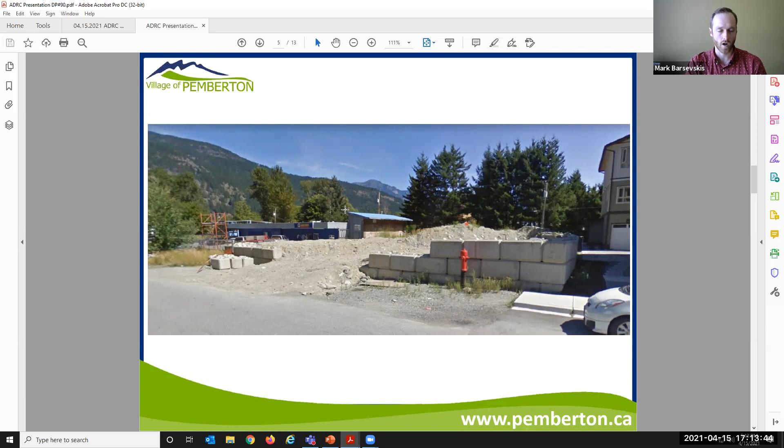Currently the site is vacant, with preload and lock blocks and a little bit of vegetation around it.

So the proposal is for one mixed-use building, which is 3 stories. On the ground floor we have 2 commercial units. On the second and third floor we've got 10 residential units, 7 being 1 bedroom plus a den, and 3 of them being 2 bedroom. The architectural style is modern contemporary.

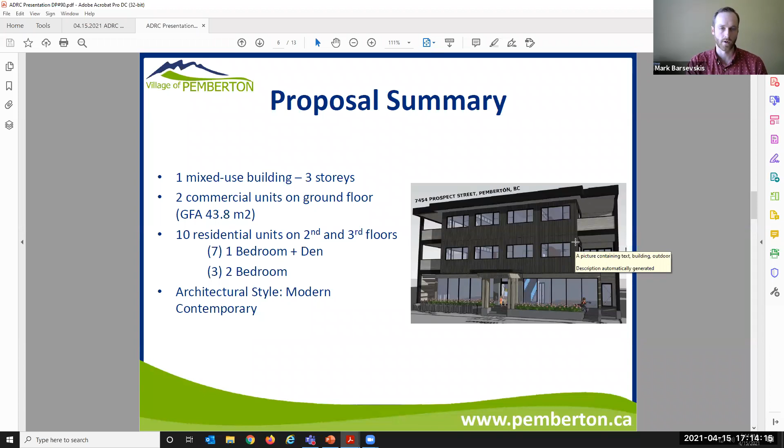The color palette includes shades of brown, bronze, gray, and black. We've got wood, light metal siding, and finished concrete around the building, corrugated metal on the sides here on the upper 2 floors, and these vast glass windows on the ground by the commercial units. Black is used as an accent color throughout the whole building.

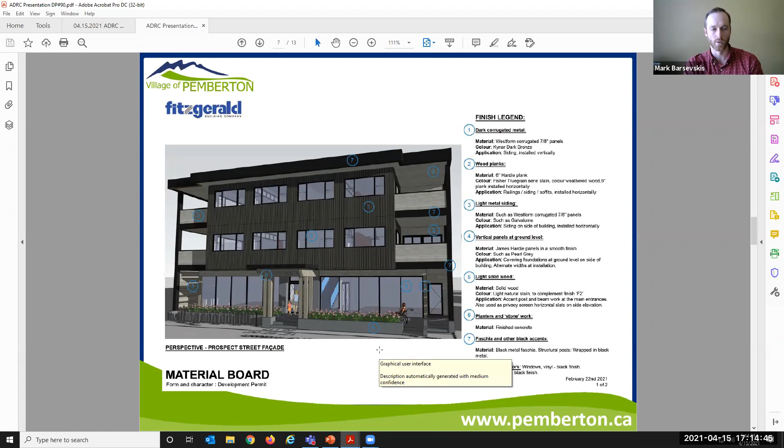This is the north and south elevation, which would be the sides of the building, very similar to the front, minus the glass facade and the pedestrian realm. Then we've got the alley elevation to the east, and the front elevation to the west, back and front.

For the landscape plan, we've got proposed landscaping of 2 trees, right now they'd be red maple. The ground cover is grass, but the applicant has let the village know they're inclined to switch it if need be. We also have 2 planter boxes along the front with perennials in them, and again the applicant can switch them around if need be. There's bicycle parking, and the stair and accessible walkway.

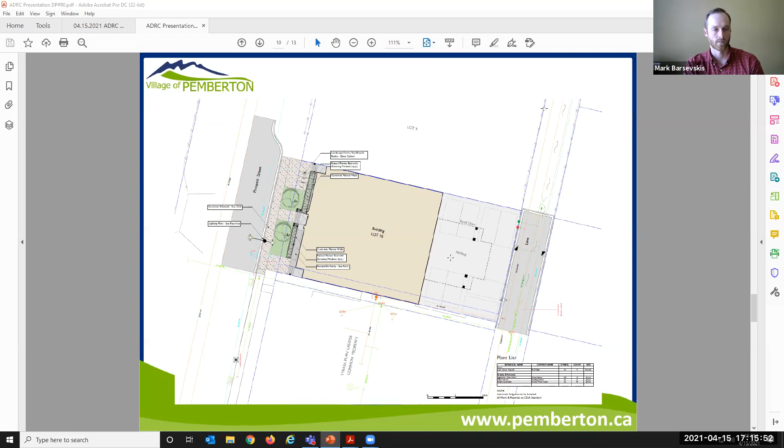As for the zoning bylaw regulation, it does meet everything. Mixed use buildings are permitted in the C1 zone. They're below the maximum floor area ratio, below the permitted maximum lot coverage. The required setbacks - front, rear, and interior - all meet the zoning bylaw. The height is at 10.5 meters, which is aligned. Parking spaces are required for 18, they're offering 15, but under the zoning bylaw they have the ability to do cash in lieu for those 3, so no variance is required for parking. For bicycle parking they are required 4 spots, and they're installing a bicycle rack up front as I showed - they'll have at least 4 bicycle parking spots.

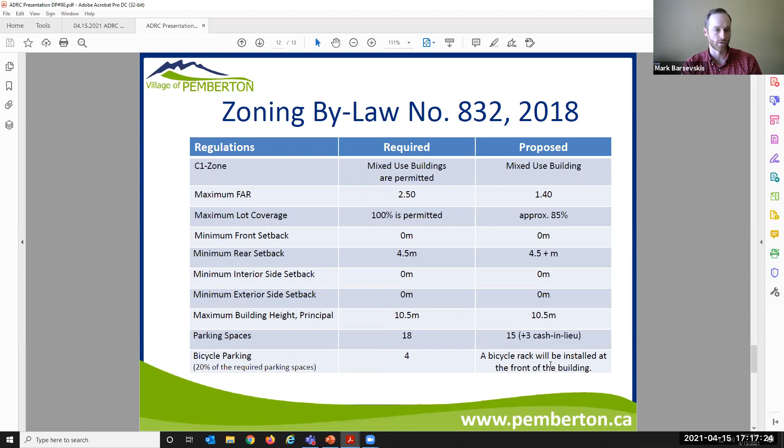So the advisory, this could be a potential draft resolution for you: the Advisory Design Review Committee recommends that council support proposed development permit number 90, Tenquille Building, 7454 Prospect Street, subject to the following recommendations that you will come up with. Thank you very much. Any questions?

Should we go around the circle with questions, potentially do a round of questions and then a round of comments?

Okay, so do we want to start with Jason? Is this when we're just talking to Mark about this, or are we talking to the builder and the designer? Are they here? I don't think they're here. Christina, the applicants are here, but at this point in time we allow for questions of staff before we go to the applicants. What we'll do is promote their representative as a panelist, and then you'll be able to see and hear from them. So at this time, it's your opportunity for questions of clarification from staff.

Lisa, will the applicants be doing a presentation as well? They have the opportunity to do a presentation as well. Okay, good to know.

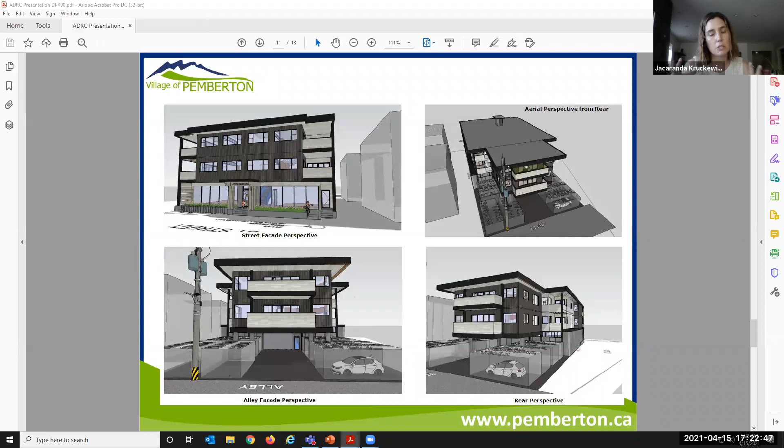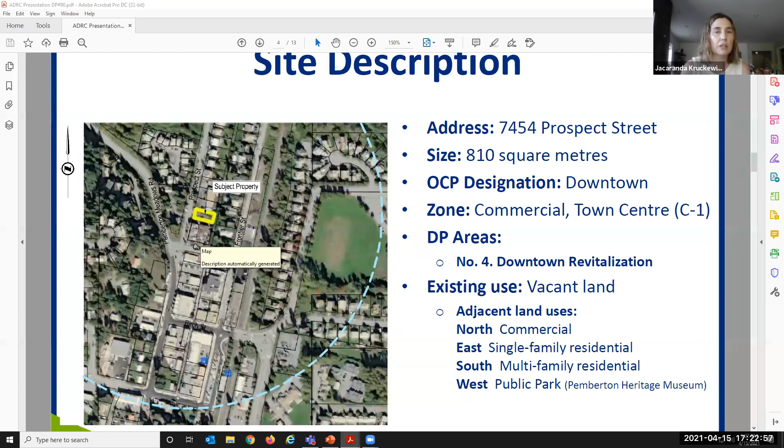Okay, and Jacaranda? Yeah, so I'm unclear - is Prospect Street part of a bigger development strategy that is going to happen in the future? It has always been felt, or said anecdotally throughout town, that that's the direction downtown enhancement is going to go. So I'm wondering, are we going to be looking at some of those older houses for more development, and even that kitty-corner lot that's for sale on the other side - is that also zoned so it could have a similar development? I'm not totally sure about that, I could be wrong, but I'm just wondering what the greater plan is for that corridor, if there is one.

I can take that question, Christina.

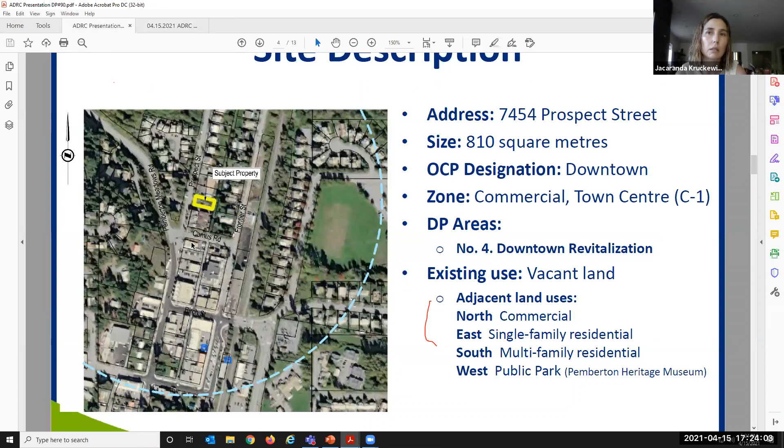Currently this property is zoned C1, sandwiched between Expedition Station and Napa, so obviously the zoning is in place for this type of development. To the rear and kitty corner, the property currently for sale, the two lots at the corner of Camus and Frontier Street, are zoned R1 residential. However, there is interest on behalf of the planning department to see that lot rezoned to allow for continuation of the C1 zone. I don't have ambitions that we're going to see the whole area go from R1 to C1 eventually, but I think if needed, that would be a natural progression or extension of the downtown.

But we don't have any plans to push that along ourselves. It would just depend on if the properties come up for sale and if applications come from a developer that buys them up. We've definitely got some longstanding residential uses there, so there would have to be support from them for a successful rezoning, as well as council support. But if an applicant were to come forward with an application to rezone what is known as Betty Mercer's property, staff would be supportive of the change from R1 to C1.

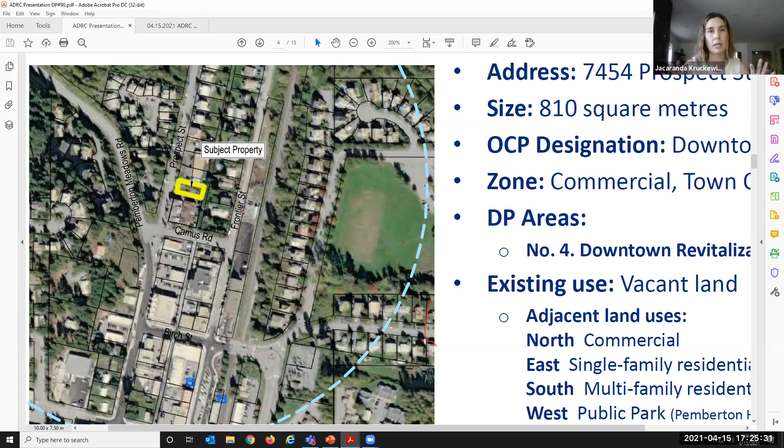The other question I had is on the Prospect Street commercial frontage side, there's the preload now. So is there going to be a lift up, or is it sidewalk level entry? How does that look elevation-wise? Is that the road, sidewalk, steps - but then we do have this accessible ramp going up into the commercial units. Okay, so it is like road level?

Yeah, this part's road level where the cursor is, but there is going to be a step up to the building, and you can't go in via wheelchair through the front door unless you go up the ramp. So in order to meet the FCL, I assume they would have to step up the ground floor to a level. It's very similar to where Expedition Station is.

If you think of that development, there's some landscaping that sits between the sidewalk and what would be like the entrance sidewalk to the storefronts. So that would be level with where the planters are in front of this new commercial space - is that what we're thinking? Like it's all going to be one plane? I think that would be great to clarify with the applicants.

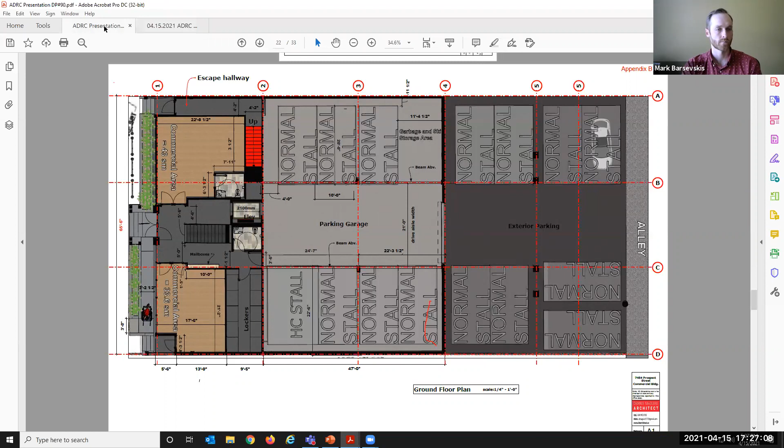Just to go back, it does look from the architectural drawing that there is a locked parking garage here. Yeah, that's what I thought, but I would still like to clarify. So that's all I was thinking - if the raised planters and the sidewalk follow along from Expedition, just to be nicer on the eyes. That's all, thank you.

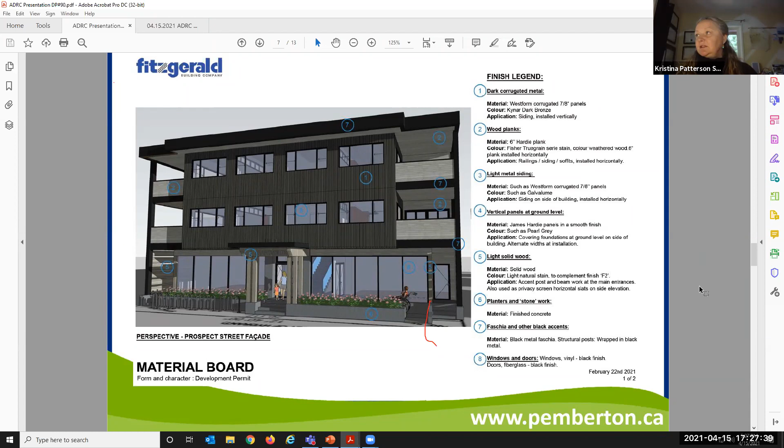My only question is, I'm trying to understand the road shown - I'm looking at the landscape plan and I only see a chunk of curb that starts at the property line and goes up, and then it looks like it's curving. Is that allowing for a drop off or something? I don't really understand what's happening with the road there. Does it jut out on purpose? Does it already do that? Is that proposed?

Are you talking about this section? Yeah. I believe this is for the parking, and that's a parking bay, and then it goes to the normal road. I see, so it's like a lay-by or some kind of drop off. Okay, that's my only question.

So I think we've gone through the questions, so now we will invite the applicants to speak.

I think Lisa's just promoting them. Okay, sorry everyone, unexpected question from my son there in the middle of everything.

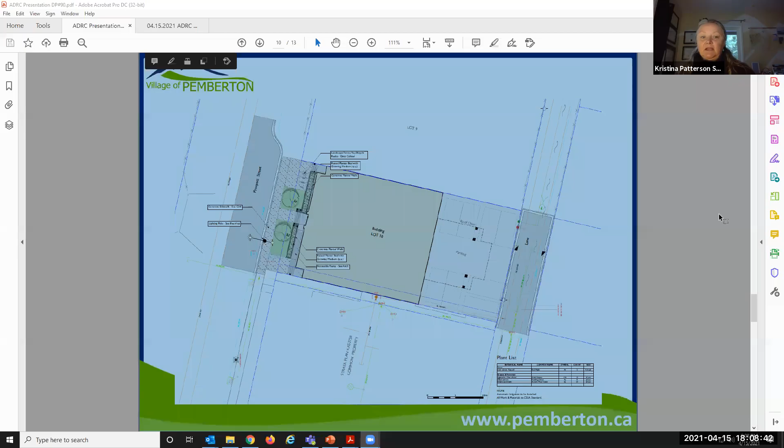No. Is there some kind of a proposal for what the raised planters look like? Yes. Mark, did you include the landscape plan other than just the site plan? Is there a plant list on that too? There's a plant list, but I'm talking about the actual materials, like what the planter is made of. It says concrete, but are we looking at brushed concrete or polished concrete, or is there anything else on the property that this ties into or augments?

Tom, do you want to answer that? Yeah, sure. So what we're looking at here, 6 planters, there you go - finished concrete.

So it'd be like a paper face form ply. And that would tie in, if you look on the sides of the building, right there, that's a Hardie panel. That's a smooth Hardie panel right there. So it kind of ties in with that.

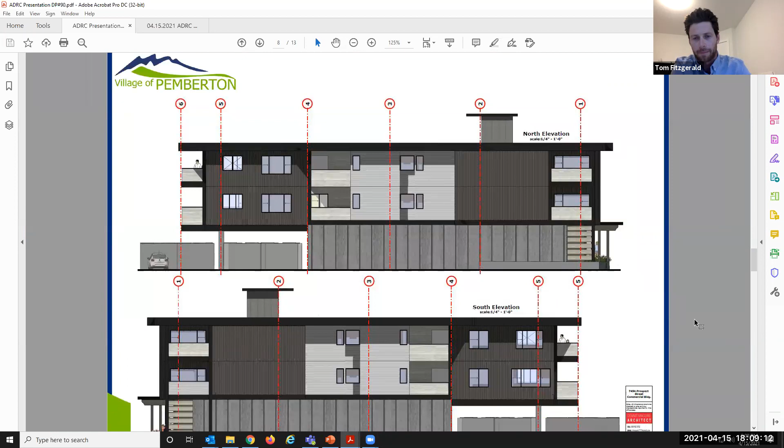Perfect. And then the other question is, it looks like there's a sidewalk. I'm just curious, is this like a traditional sidewalk that would be concrete with expansion joints, or is this something that would then have to tie into any other developments up and down the street?

It's tying in with exactly what Expedition Station has done up to the end of their property line. ISL will give us, we do have a civil engineer doing all the drawings for that, Creus Engineering. We will be following exactly what ISL wants to see as far as it's going to meet the MMCD construction documents, to make sure that sidewalk from Expedition Station continues in front of this development, and eventually one day probably in front of where Napa is once that property is redeveloped.

It has to be following all of the MMCD documents, which is the municipal construction standards. Yeah, I'm familiar with those.

I'm not really asking so much about the construction, but more the form and character of this sidewalk - if it is intended to be anything different from anywhere else, and if there are any guidelines for future development along this sidewalk, because sometimes that's how you can differentiate a neighborhood or commercial sector from another. So it doesn't sound like there's anything like this. Maybe this is more of a question for planning, maybe I should have asked that prior.

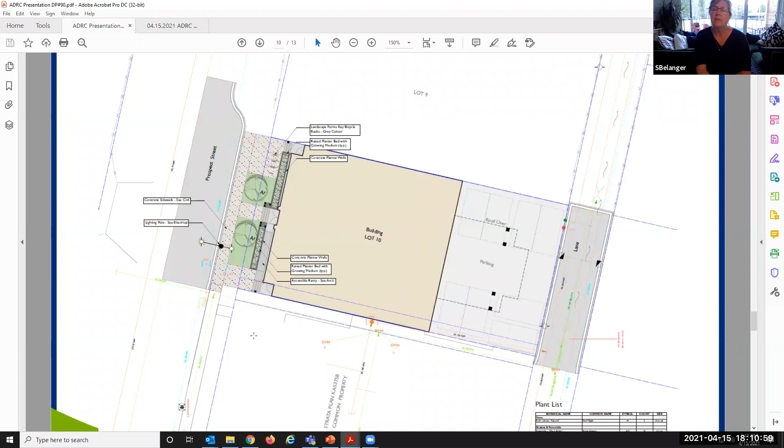I think, Lisa, tell me if I'm wrong, but once we do get a DP issued with the comments from ISL, it's going to give us what they want to see, what kind of construction standards, not just construction, but also what material and finishes and so on. Is that what you're referring to, Kristina?

I'm talking more about streetscape guidelines, that's more of what I'm talking about. Well, the streetscape guidelines are included in the development permit guidelines. We don't have anything separate from that, but we do have our subdivision and development control bylaw with respect to grades, and I'm not sure about finishes, but I can't answer your question with 100% certainty, but I believe we will get some direction from our engineering review.

Okay, but I'm not really talking about an engineering review, so maybe I'm not really articulating myself. I just want to make sure that you don't paint yourself into a corner in terms of the way it looks, and if you wanted to tie in a streetscape vernacular in the future, you know what I mean?

Right, that's all. Okay, well it would be preferred, I would assume, that the sidewalk lines up with what's in front of Expedition Station, and that the material and spacing is exactly the same. And that would be the municipal standard for the downtown. That's all I was curious about, because I wasn't sure if there was something different. I'm trying to think of how it ends.